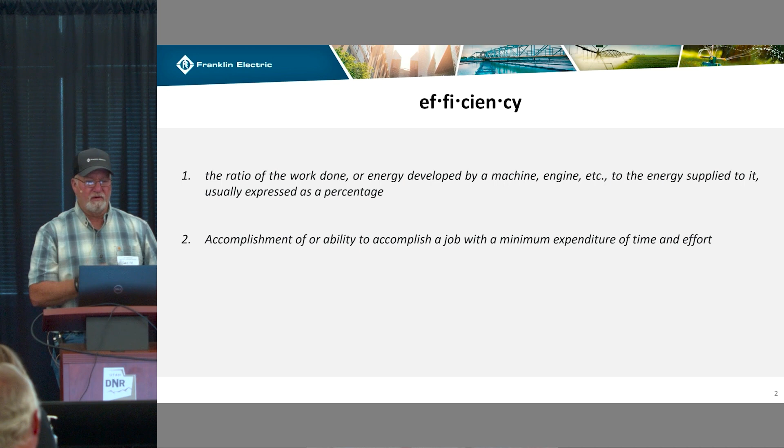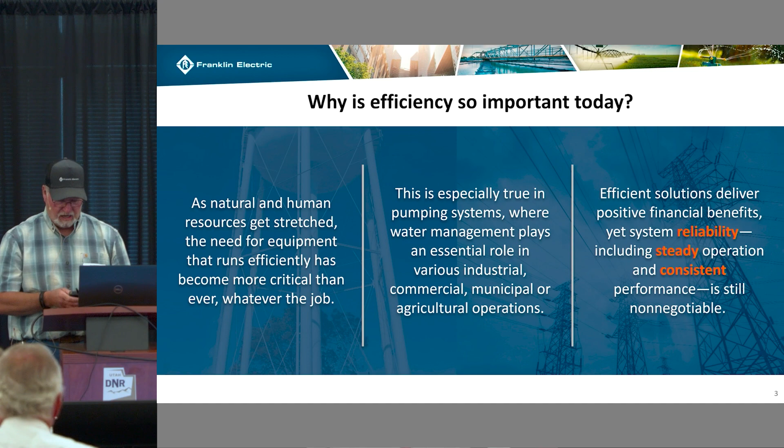So why is efficiency so important? Here are the top reasons it's important in our industry, the groundwater industry. Number one, our resources are being stretched, creating a higher demand for efficient equipment. Number two, efficiency is becoming extremely important in water management. And the third, to me the largest, is the financial benefit. So those are the top three reasons why it's so important in our industry.

When we think about efficiency related to pumping systems, here are a few challenges we're faced with today. We've got an aging infrastructure, and that's not just the power grids that supply us the energy and electricity we need, but also things in the actual water system itself, some aging components, piping that's degraded, different things like that. And then more power consumption is being used, more water is being used, and there's more of a need for water conservation now, and more regulations being put on us.

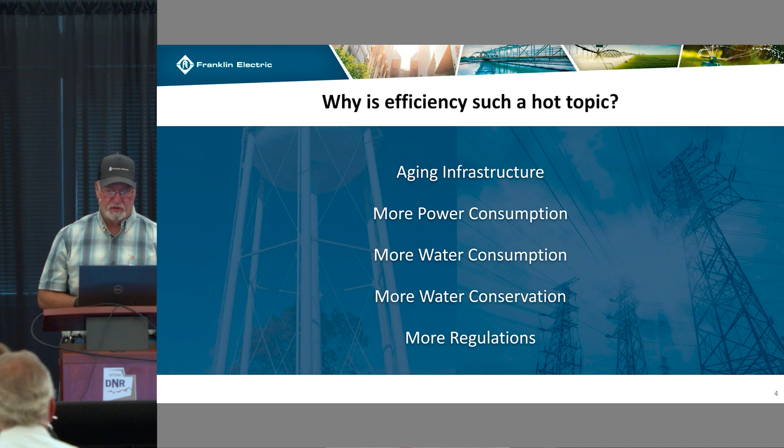The other problem we're seeing is people moving from other states into our states. I happen to live in Idaho, I can say yes, it's happening. And you live in Utah, and I know you've felt it and seen it too. So with that, it's just requiring more power, more water, and people are moving out of places that might have had water, now they're moving into places where there's less, and we see more and more of that.

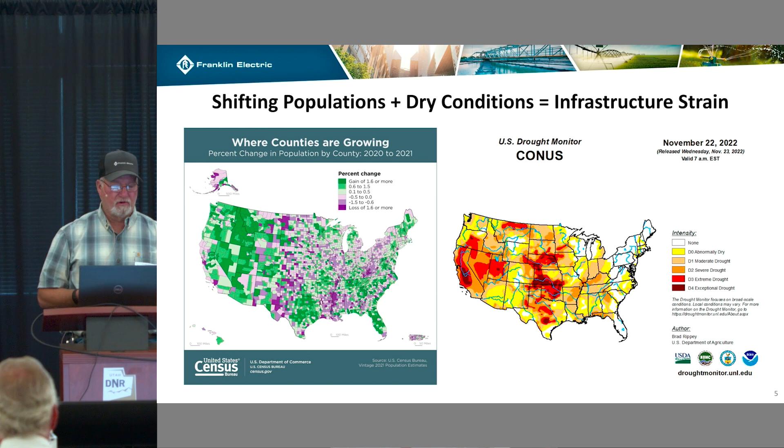So what happens when all of that goes on? Everything that gets a higher load rate on it, especially utilities, the price for power goes up. And not only that, but governments get involved. And I can tell you that there's already some involvement there.

So I can tell you that one thing Franklin looked at and did was not only did we meet those standards, but we exceeded those standards. And so everyone had to start putting what they call a pump efficiency index on every single product out there. And then we saw it before that with, say, surface pumps. And that's why premium efficiency became so important in the surface pump world.

Yes? So how did you do that, you just make the windings tighter? I'll get to that.

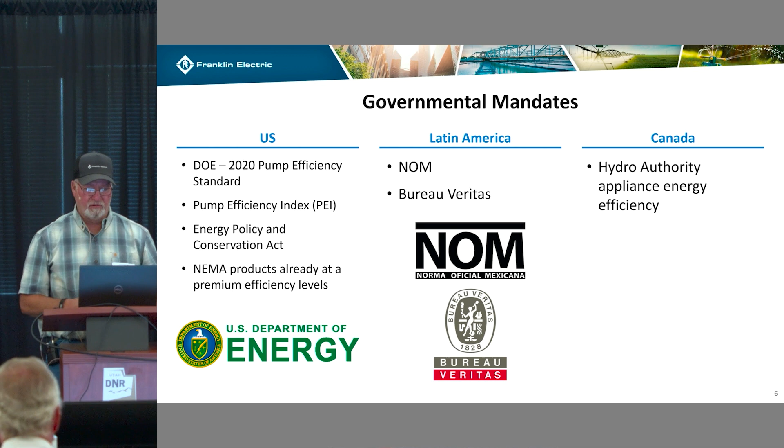Okay, so basically all of these regulations being put on us, this list is just going to grow, and the demand for more efficient pumping products is just going to increase. We won't see that decrease ever.

Franklin's getting ready to celebrate 80 years in the industry, and so we understood and knew submersible motors. For years we were making our motors for other pump manufacturers. And when Franklin decided to get into the pump business, we understood that there was a need for an efficient 4-inch pump.

So I want you guys to think about something. A standard 4-inch pump for years, the standard hydraulic design, is what we call a pancake style impeller. It's flat across the top and straight flat across the edges.

So I want you guys to think about something. As that water comes through the suction of the pump, the first thing it's doing when it goes through the eye of the impeller is it takes a 90-degree turn. As it exits to go to the next impeller and the next stage, another 90-degree turn. When you continually do that and you have a high stack rate, to get water to the surface and build pressure, you just continue to increase stages. And with all of those 90-degree turns, that 4-inch pump with that flat pancake impeller becomes very inefficient.

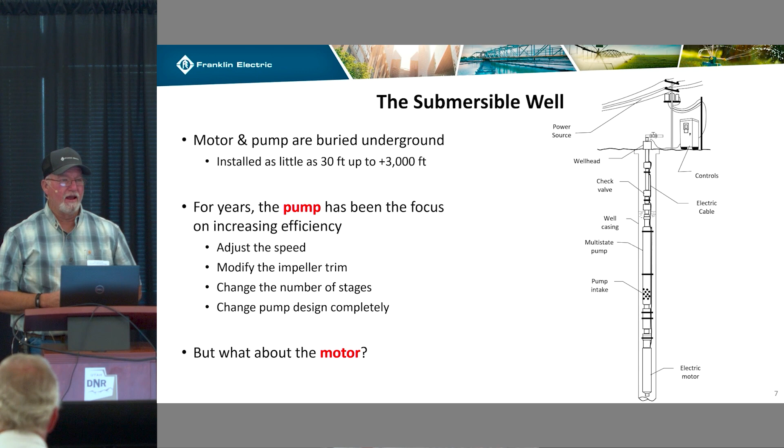I guess I don't know enough about it, why does that make a difference? I'm not gonna lie, that is way over my head as far as how that process goes, but I can say that it makes a difference in the temperatures that it can handle. It makes a difference in abrasives that go through the pump, how well it handles that and stands up to that. Yeah, exactly. The glass filling is what gives it its abrasive resistance and temperature resistance. It makes it tougher.

Okay, so on your different stages, it would seem like there's only two things if they're all hooked up to the same motor, turning the same speed. So the only two things you could change would be the tilt on your blade, or the spacing, how many of them there were in each stage. Correct. And you would seem like you'd need to change that as you went up the stack, so that each one is able to apply some more pressure from the one below.

Actually, all of those impellers in, say, our 4-inch - now there are some turbine designs, but we only change those when we're looking at horsepower. So when we start to trim those and change impeller sizes, we only do that in, say, very large turbines. We don't do that in our 4-inch product. So they would all be the same, all the impellers are identical all the way up the stack.

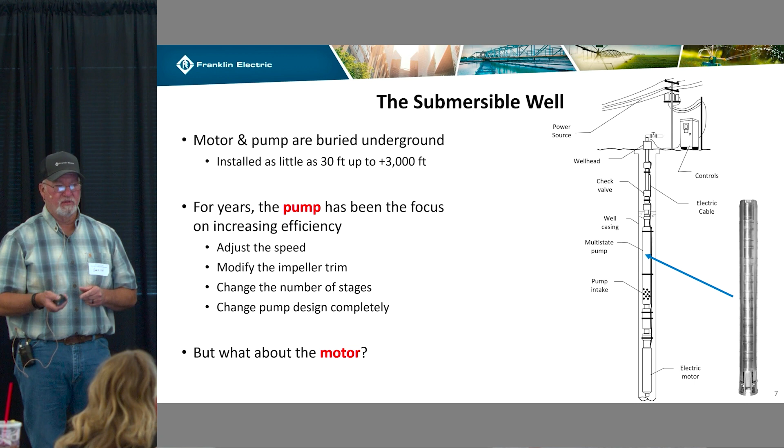Correct. But the higher efficiency comes from the actual impeller design, being a radial turbine design versus what we consider an inefficient flat pancake design. Pushing up instead of out. Correct. So if you think about what has changed there with the pump over the years, what hasn't changed? There's the pump. The motor hasn't changed for years.

Franklin's been a motor manufacturer for almost 80 years now. Franklin actually came out with the very first encapsulated 4-inch motor for wells. We didn't invent the very first submersible motor for wells, but the first encapsulated winding was from Franklin Electric.

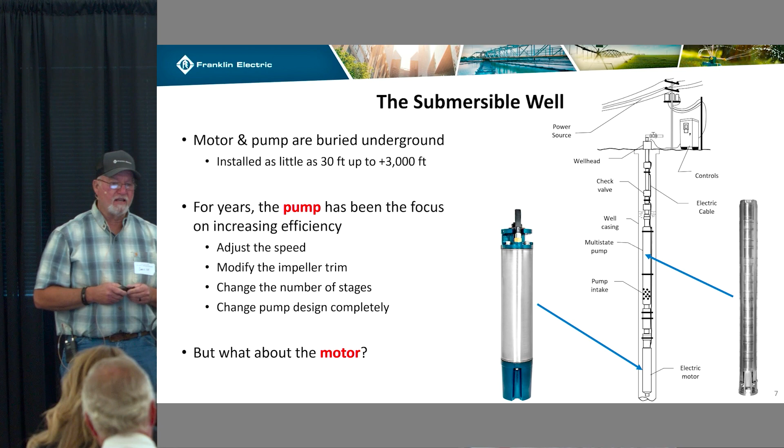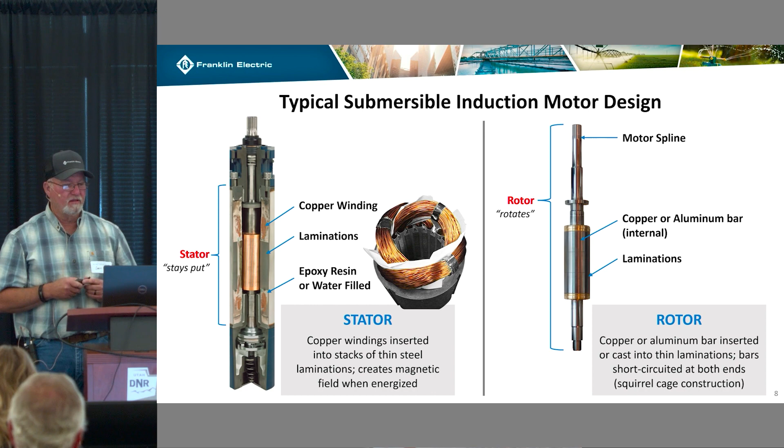So there hasn't been many changes as far as the motor goes, right? When we look at a submersible motor, I only really want you to remember two things about the design: that the rotor rotates and the stator stays stationary, okay? I'm going to jump through some of these quickly so we can stay on track.

So when I talked about in an induction motor that the rotor rotates and the stator stays stationary, I want you guys to think about how this works. We actually apply current to the stator, and the current is what turns and goes around the stator. That then is transferred to the rotor and creates a magnetic field. Then that rotor starts to turn.

But I want to tell you why an induction motor is not very efficient, and that's because there's losses in that process. As we're creating that magnetic field and forcing that rotor to run, we have some losses. In the submersible motor world, we call those losses slip. So if you open up a pump curve, 90% of the pump curves you're going to look at today are all probably 3450 RPM, not 3600 RPM. 3450 is in relation to what goes on when we have what we call slip.

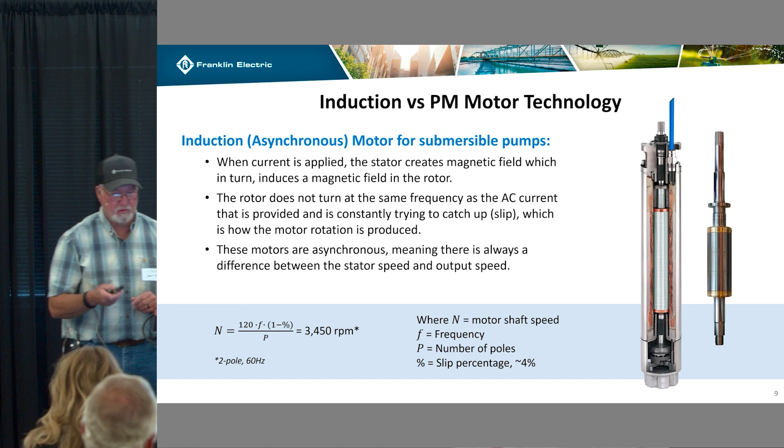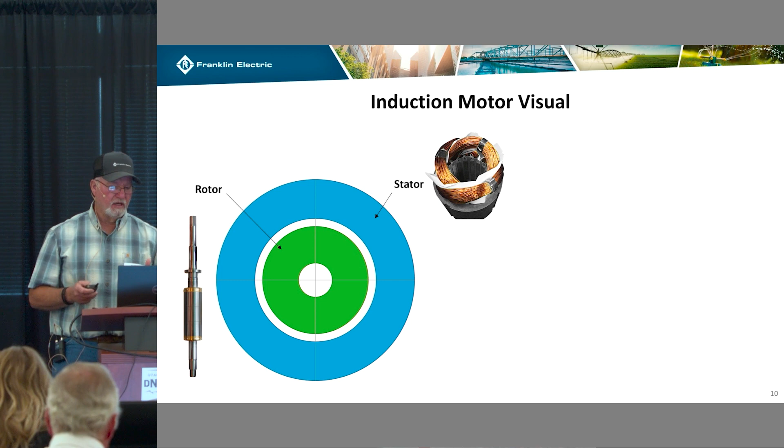Okay, so here's kind of a visual of an induction motor. The green portion being the rotor, the blue being the stator. We apply that current, which is in red, and it starts to go around. But as you notice, the rotor does not turn at the same speed. Think of it as a dog always trying to catch its tail, turning in a circle.

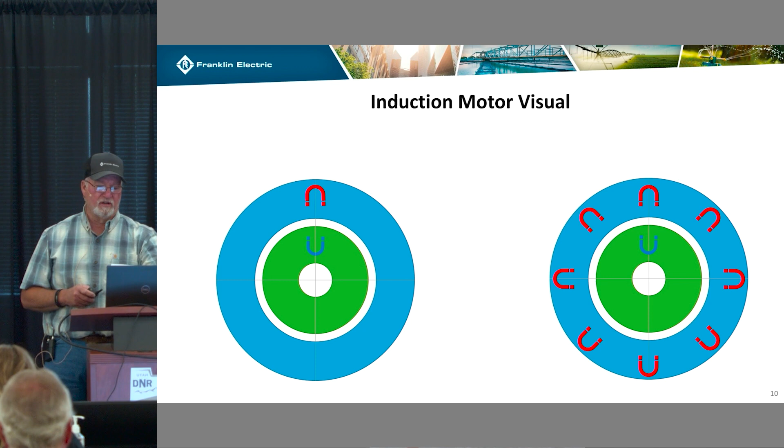Here's what that looks like, because remember, I did say the stator was stationary. So this just kind of shows that current moving around the stator, and then the rotor following it. But it's not synchronous. It looks like they're going the same speed, it just is lagging. They are, so you're correct. It does lag behind. It's not a true synchronous motor. It's what we would consider asynchronous.

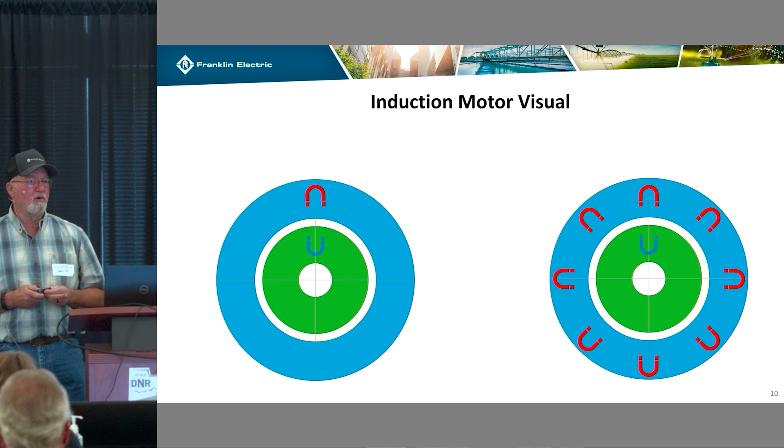So if you had them matched up, would that be more efficient? The less load you have, the closer it gets to synchronous speed. So at 3450 at full load, at no load it's going to be running at 3550 - it'll run 100 RPM faster at no load, because the torque is developed by this thing called slip, and the farther the electric field is behind, the more torque it develops. Well, the more electricity it's going to use too. Sure.

Okay, so one thing that I really want to point out here, and I want everyone to walk out of this room and remember, is that we didn't just go out and create a whole brand new motor design. The only thing that changed in the Franklin Electric submersible motor that you know today is the rotor - we took the copper bars out. If you see in this picture, all the way over here to the right, you're going to see the copper bars. So we took those out of the rotor and we put in rare earth permanent magnets.

That's it. The sealing system stayed the same, your thrust bearing system stayed the same, the way that we encapsulate the windings, right? Everything else - the material on the shell of the motor, the whole 9 yards, the way we do the shaft - everything is still the same. The only change is we took out the copper and replaced it with magnets.

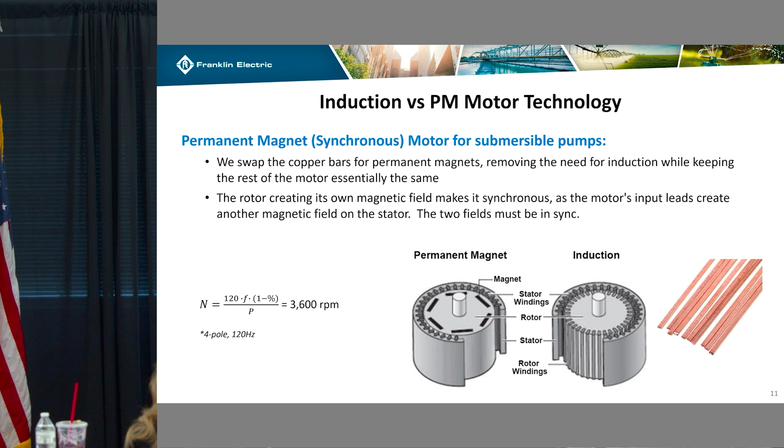So what did that give us? Well, now we don't have to create that magnetic field. We don't have to take that current applied to the stator and have those losses go to the rotor - we've captured all of those losses. And now with this design, as you can see, we've got an example of an induction motor and a permanent magnet motor, and you're going to see that the permanent magnet motor is a true synchronous design.

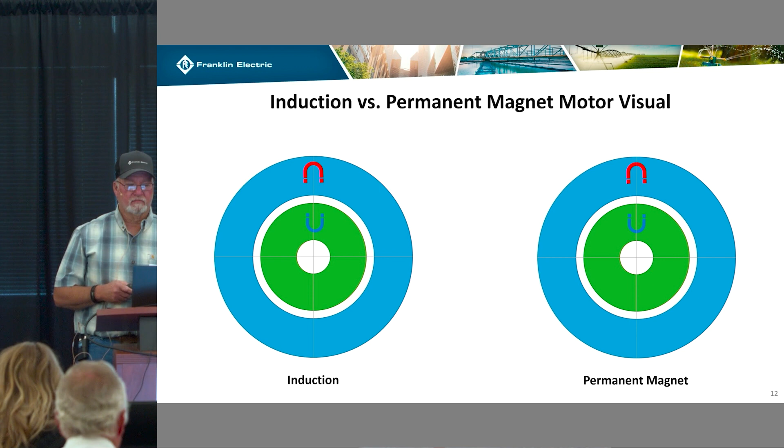Is that just because instead of dragging it, you have to induce the field, so there's some lag there, and that's why it's dragging on the other side? The magnets in the rotor are actually pulling too? The magnetic field is more uniform, so you're not getting the lag.

Yeah, correct. This is why I'm glad I brought Paul with me. You don't have to energize or induce the current any longer because the magnetic field is already there in the rare earth magnets. Thank you, Paul. You're ready to go at start. So basically, we've taken away having to put that extra current into the stator and transferred that to the rotor. It's already in the rotor. Those magnets are already there.

So it runs 150 RPM faster? Yeah, it does. It has the ability to run that, yes. And I'll tell you why we don't run it right there out of the gate in a couple more slides. But thank you, Kyle.

A true synchronous motor runs at 2-pole speed, which is 3,600 RPM. You are correct. And that's also an advantage with a permanent magnet motor, and I'll show you why.

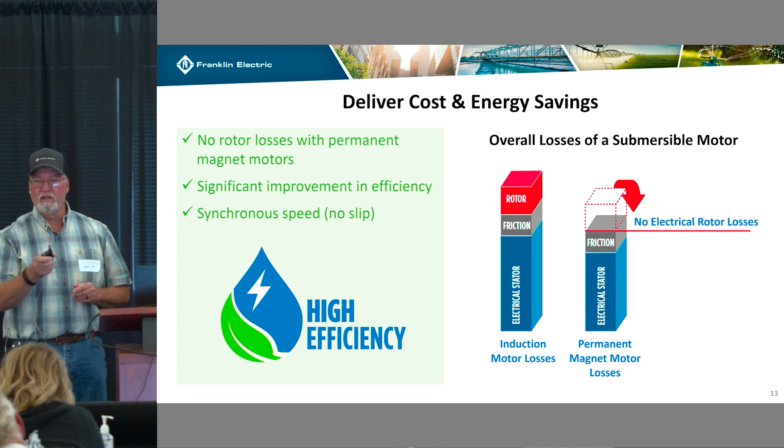So when we look at what we actually gained, we have to keep a couple things in mind. We have the same bearing system and the same sealing system, so basically we have the same friction losses as we did with an induction motor. But where we really gain is that now we have no electrical rotor losses.

So how much more efficient is the permanent magnet motor than an induction motor? We've made up this chart showing 4-inch through 10-inch, and by the way we are making this through 500 horsepower today. If anybody wants to order a 500, I'm taking orders today, and I'll give a discount, just one day only for the Utah Department of Water Resources training.

Everything in green is what you gain, everything in blue is a standard induction motor, and this chart shows efficiency. The biggest gain, looking at the 4-inch, would be a 5 horsepower: an induction motor is 78% efficient, permanent magnet is 90%. Looking at the 6-inch at 60 horsepower, a 6-inch induction motor is 84% efficient, permanent magnet is 92%. That means there's up to 12 points, a 21% improved efficiency using a permanent magnet motor.

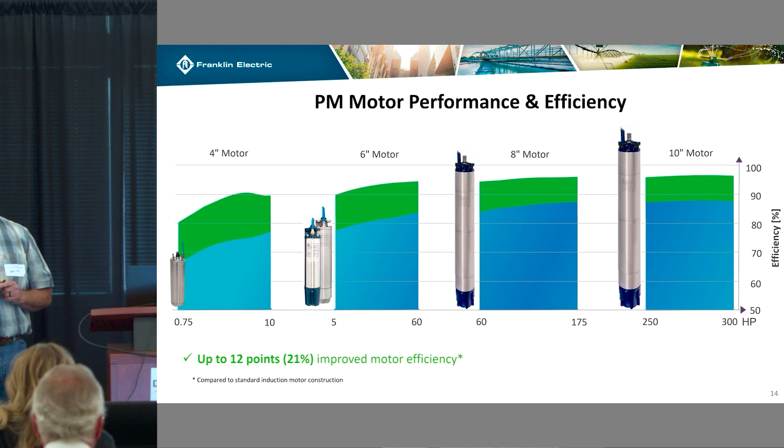And by the way, to Kyle's point, that's compared to a standard induction motor construction at 3450 RPM. This motor has the capability to run to 3600, and I'll talk about that too.

Are those all on the top of that small one? I noticed it goes up and then back down as you get from 8 to 10 horsepower. Do they all do that if you ran it out a little ways? Is that why you're going to a larger motor, or is it just to fit a larger hole? Because you're squeezing 10 horsepower out of a 2-inch diameter rotor and a 3 3/4-inch diameter casing.

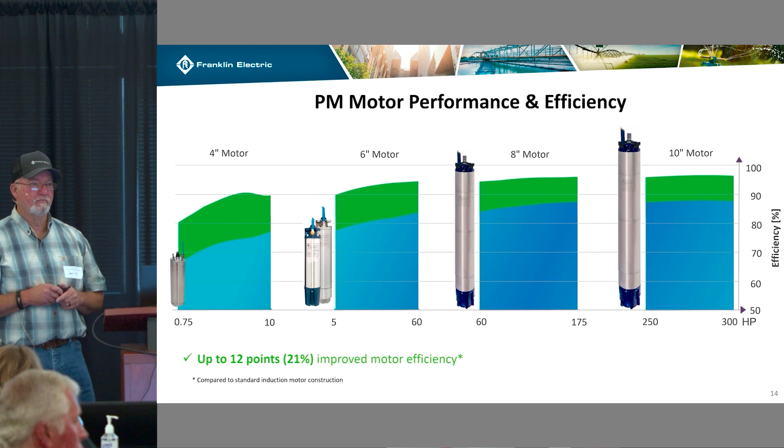And that's really hard to do, so that's why the efficiency dips at the top end. The bigger motors are just this big around, you're getting 10 horsepower, the rotors that big around, and that's why the efficiency goes down, because it's almost an impossible task. Right, but Charlie, you're correct.

Why haven't we seen any permanent magnet T-frame motors? It's coming. Did you guys really start this design? So Franklin—and this is a perfect slide to explain this.

Permanent magnet motors are nothing new. Most of the appliances in your home—dishwasher, washing machine, refrigerator, your computer drive motor, swimming pool pumps—it's huge. In fact, in the state of California, you probably can't buy a swimming pool pump with an induction motor; their regulations say it has to be permanent magnet.

Electric vehicles, most of your hand tools - permanent magnet motors have been around for a very long time. Franklin has been building permanent magnet motors for years. In fact, for one of our competitors, we manufactured their permanent magnet motor for about 10 years. In Europe, this 4-inch permanent magnet motor is our most popular motor, and that's all due to regulations. So we've been doing this for a long time - not 30 years, but 10 years plus.

But what rare earth minerals you mentioned, are they the magnets? Yes, rare earth magnets. Where is that coming from? That's something I never would have asked before the pandemic, but the supply chain got screwed up, and I know most rare earth stuff comes from China. Most of it is European. And I will tell you, our manufacturing facility is also in Europe today for permanent magnet motors.

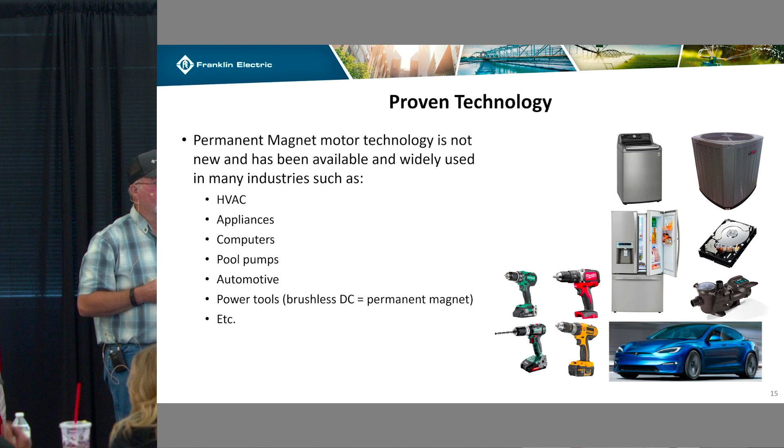Right, but DC motors are way less efficient. Locomotives now, they're changing from DC traction motors to AC variable speed motors. Could you imagine if we could do locomotive engines with permanent magnet?

Well, so my question is, with a brushed motor, what does it look like in terms of the lag? Because you're not going to have that same lag you have where you're trying to induce a current in your rotor and then drag it along. That's the advantage it looks like you have with the permanent magnets - you're not trying to induce a current and then drag it. You've got two magnetic fields and they're attracted.

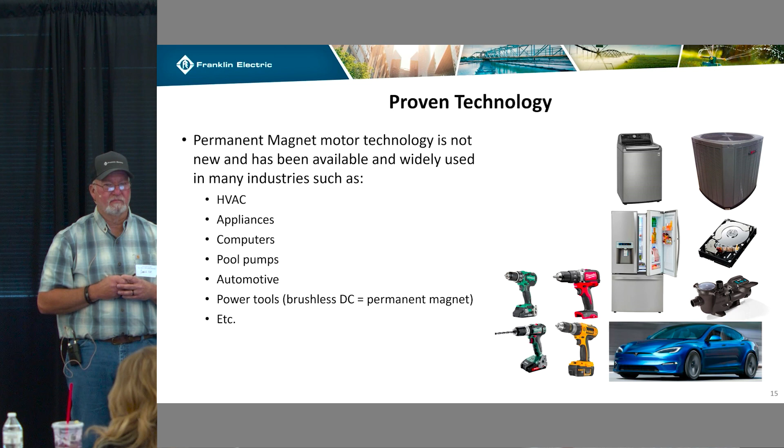Paul, do you have any input on that question? It seemed like you could do the same thing if you have brushes, because you're not introducing that extra inefficiency of trying to create that second magnetic field. Good question - electricity's already there. Well, it would work the same way, but you can generate much more power and torque with AC motors. I guess in principle it would perform the same as a permanent magnet theoretically, but as a practical matter, I don't know if that would work.

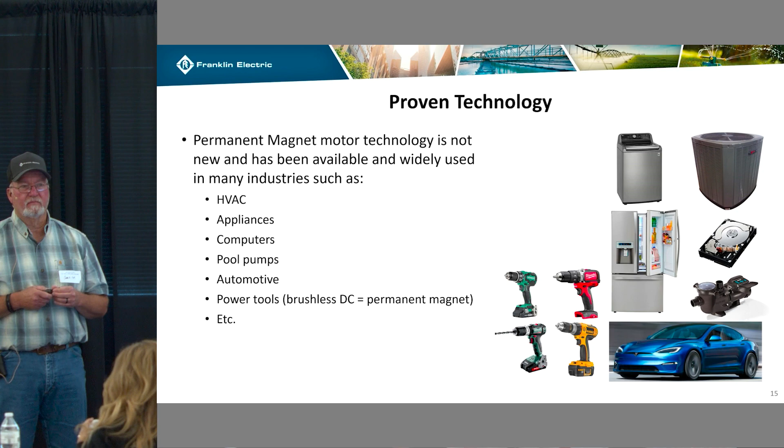Well, the alternator in your car is an AC generator, and the only reason you get DC out of it is because you're running it through diodes to flip half of the signal over. You can do that, but I don't know if pound for pound you're getting the same delivery of power out of a brushed motor as you would out of a permanent magnet. That I can't say. Oh, okay, I just wondered if you knew, yeah, all right.

Okay, so moving on. One thing I want to touch on is that all permanent magnet motors - I don't know of any that exist today that do not require a VFD to operate. I'll quickly tell you why, then we'll talk about VFDs for a minute. What needs to happen with a permanent magnet motor is the rotor and stator fields always need to be aligned. The VFD does that.

The other thing, we talked about being able to run at 3,600 RPM, right? And another feature we use, like in the sub-drive world, where we're mix-matching motor horsepowers and running above a certain hertz - we're never overloading the motor, we're never even running into service factor when we do that. But we do need the ability with the drive to run above that speed, and that's another thing the drive gives us. So the drive helps keep the rotor and stator aligned and allows the motor to run above power line frequency.

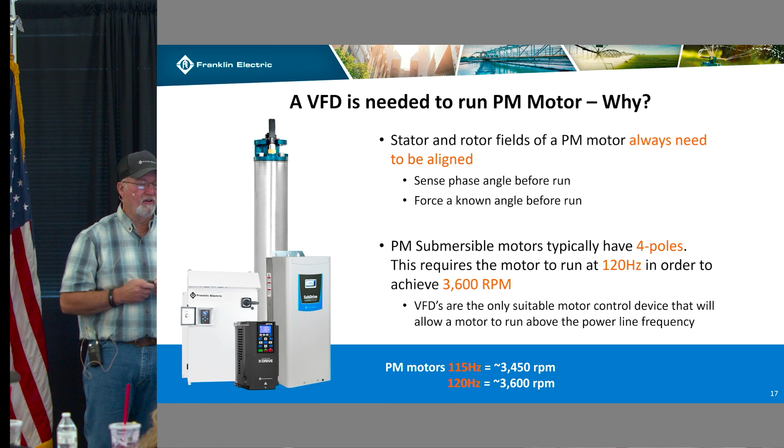Now, keep in mind that I did say it takes a VFD to operate a permanent magnet motor, but you want to make sure that your VFD has the capability of doing it.

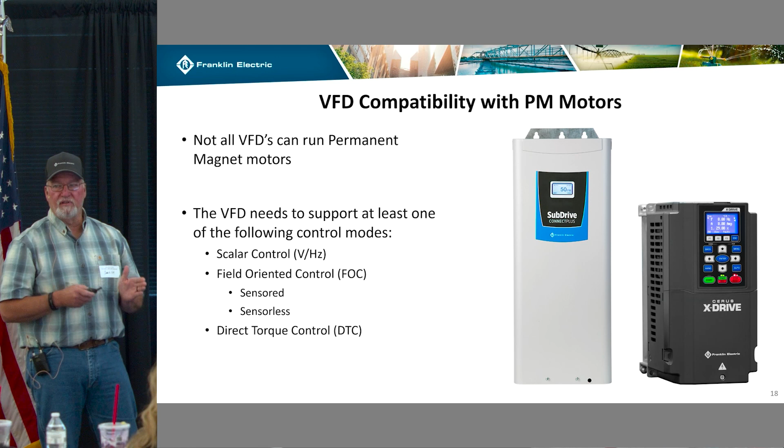So one thing, just to make this pretty short and sweet, if it were me and I was a contractor and I was going to be installing a permanent magnet motor, I would buy it as a package. I would buy the manufacturer's VFD that is probably already programmed to run a permanent magnet motor. I don't want to just go pull something off the shelf or something existing and then have to go through all that programming, and here's what that looks like.

So if you buy a permanent magnet motor system, just buy it. Doesn't matter who the manufacturer is, just buy it as a package system. Buy the drive and the motor together. That way you know they're working together, and they're probably 90% already programmed for you, as you saw in option 1.

We won't spend a whole lot of time talking about benefits of a VFD because most of you in the room already know that. But what we will talk about is how to explain that to an end user. So we all know and understand that VFDs can soft start a motor. They can prevent water hammer. They can provide us constant pressure, which is probably 99% of what your customers are looking for, right? And it can also give us the ability to convert phase, so single phase to 3-phase. That's all achievable by using a VFD.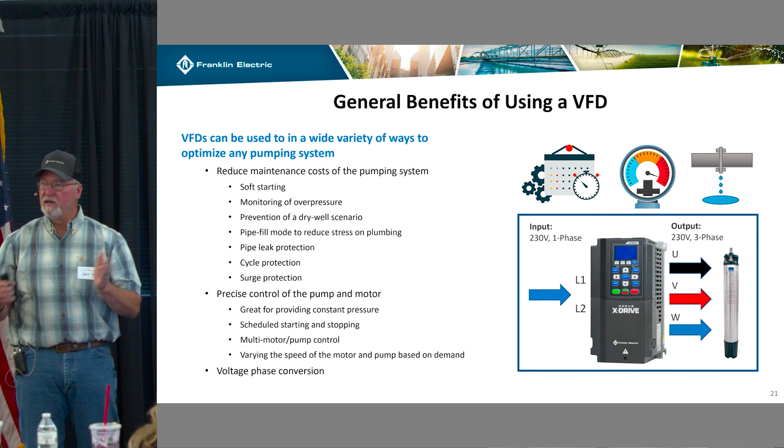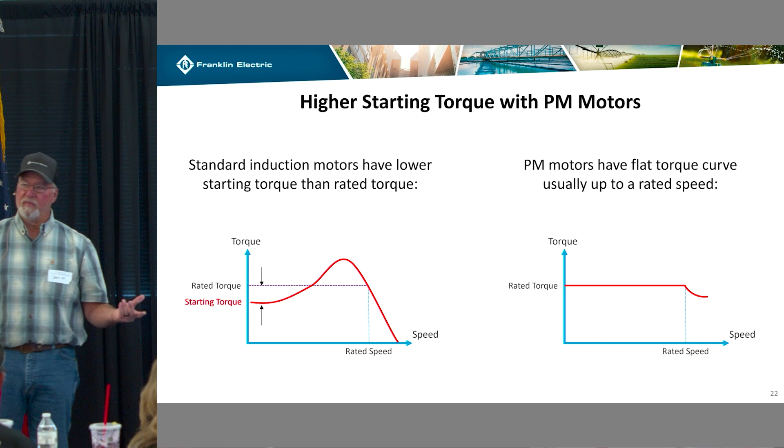One other thing you get with permanent magnet motors is higher starting torque. Let's say a cabin well has sat for months without running. Impellers could get a little iron fouled, and you could have debris built up in there. If you're on a VFD and it goes to start, what could happen? Blocked rotor - it could pull higher amps and the drive would kick out to protect it. In some cases when I get those calls, since it's a 3-phase motor, we might have you swap the leads outside and bump it backwards for a minute to break up whatever's settled inside the impellers, then start and run. But with a permanent magnet motor out of the box, you're going to get higher starting torque, so that might be a benefit.

So the other benefit - in our 4-inch line, our 2 and our 3 horsepower are the same part number. So when you open and take that out of the box, it's going to have a rating on it for both a 2 and a 3 horsepower.

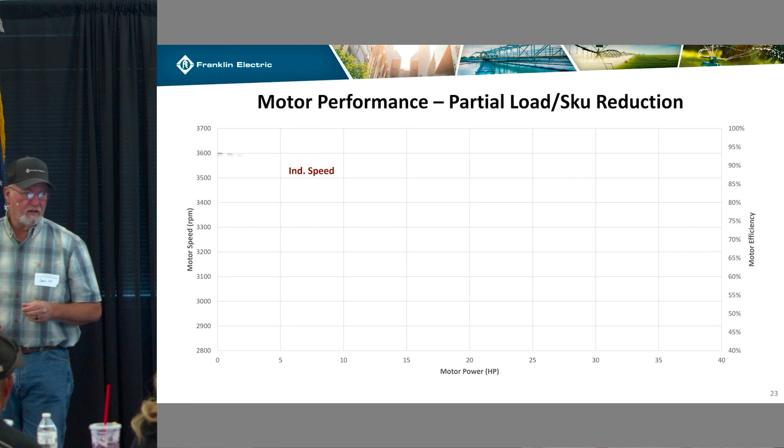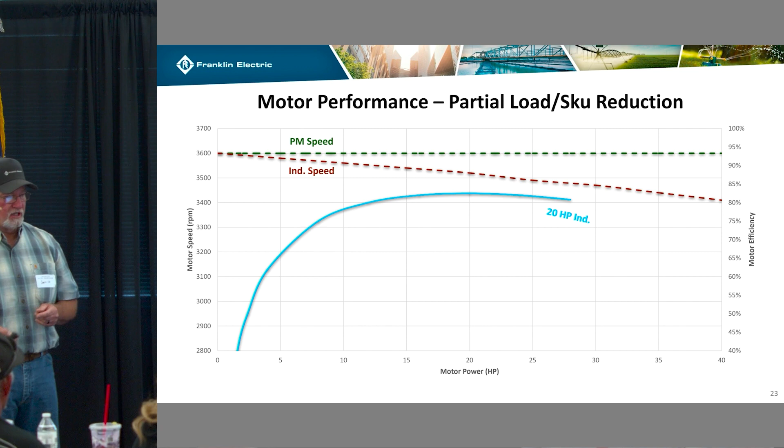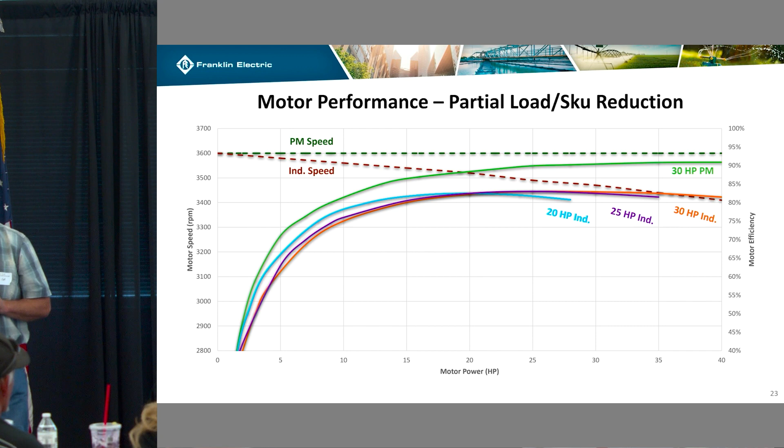Now looking at our 6-inch product line - this is just a demonstration, not a pump curve. This is a motor speed and efficiency curve with horsepowers. There's a 20 horsepower induction, a 25, and a 30. All three of these motors are covered by one permanent magnet motor. So instead of stocking 9 motors at your distributor, they're now going to stock 3. One motor covers 7.5 through 15 horsepower, another 20 through 30, and the third 40 through 60. So only 3 motors is going to take to cover 9 ranges.

There's another huge savings on cost for wire - up to 22% longer wire runs per wire size, per horsepower, okay?

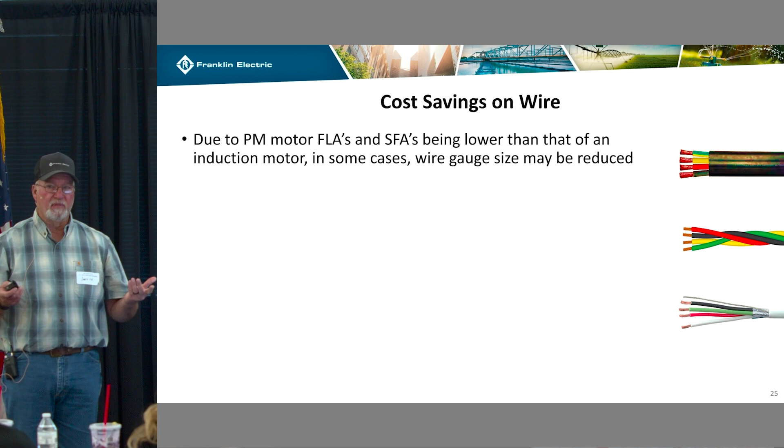That's pretty huge, let me show you an example. I used a 60 horsepower motor for this chart I made last year. A 60 horsepower, 6-inch motor is rated at 92.3 service factor amps. It's going to require number 3 wire at 550 feet. If you look at a permanent magnet motor, it's only going to draw 80 amps, and you could use number 4 wire. So in this application with 550 feet, you would have saved the end user $822 in wire - that's $822 more in your pocket.

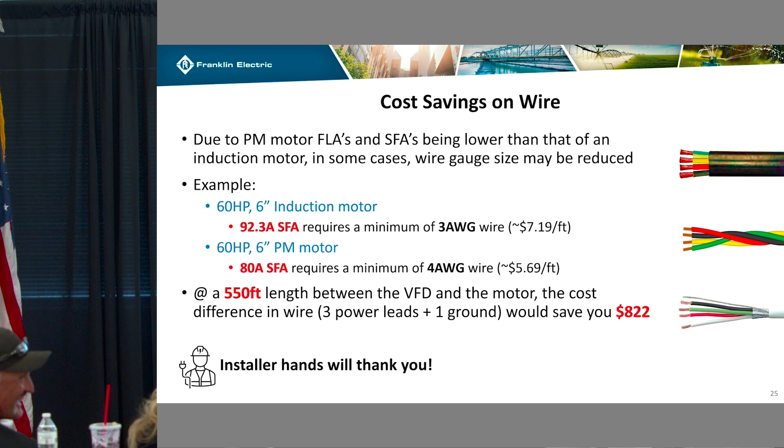Why would you give the customer back that?

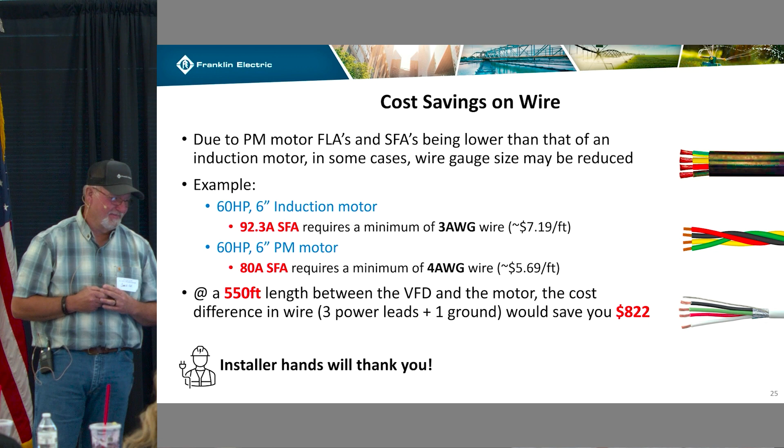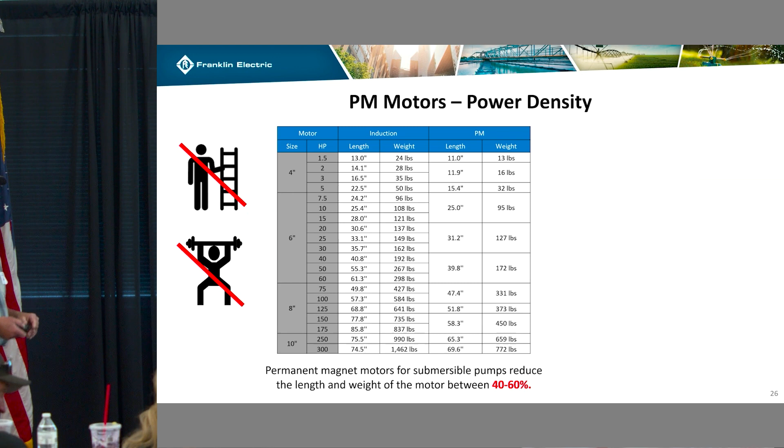Well, there you go, do with it what you may. Not only that, who would much rather be installing smaller wire? Me, right? Here's another thing that's pretty cool - the size of these motors.

I actually brought one, but then I realized I grabbed the induction motor out of my truck and wasn't going back out. So the size is considerably less - we're going to be 40 to 60% less in length, not diameter, in length and weight by using a permanent magnet motor. In this chart, using a 60 horse as an example, but all of them pretty much follow this same pattern: a 60 horsepower induction motor weighs 298 pounds and is 61.3 inches long. A permanent magnet motor is only 40 inches long and weighs 172 pounds.

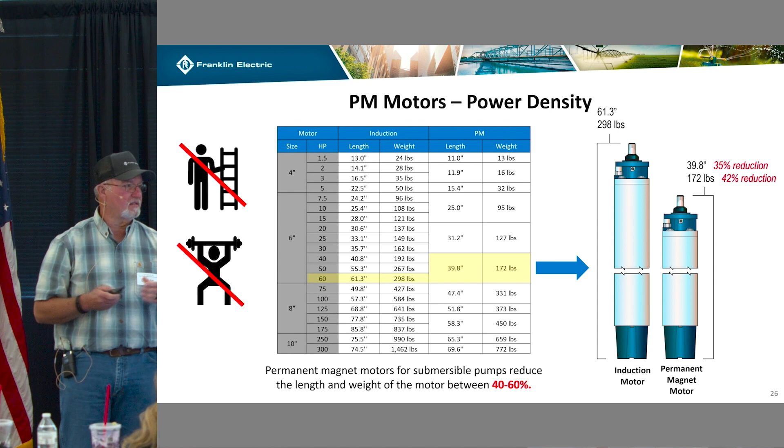So would you rather install a 172-pound motor or a 300-pound motor? It might even make a difference on what rig you drive that day, right? Might even make a big difference in what pipe you put down the well. We've had cases with really deep sets on 4-inch where the guy said, I hate using galvanized, but I have to because this is a 5 horsepower motor. Well, look at the difference in this chart - an induction 5 horse weighs 50 pounds, a permanent magnet weighs 32 pounds. Pretty big difference when we start hanging that thing at, say, 600 to 800 feet. It does make a difference.

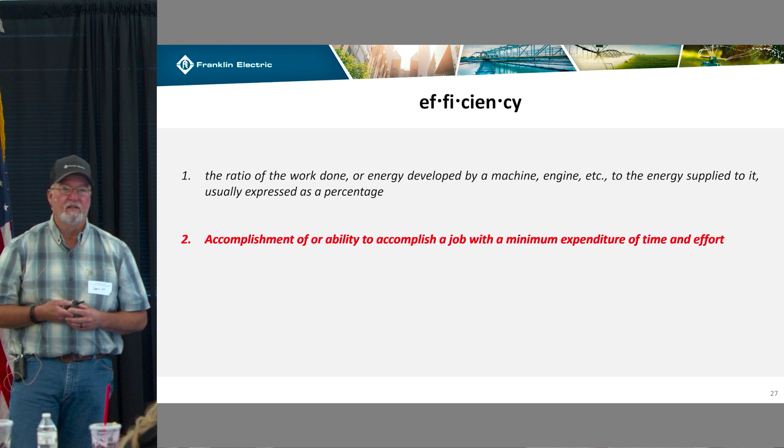And once again, it makes a difference for you. Remember I told you to remember that number 2 accomplishment, for efficiency? That becomes - you become efficient with your time and your effort. Who uses pipe wrenches? Come on, everyone uses pipe wrenches, right? Who has aluminum pipe wrenches? Why? It takes a lot less energy to use that aluminum pipe wrench. You can run that thing all day compared to a 36-inch Ridgid one, so it does make a difference.

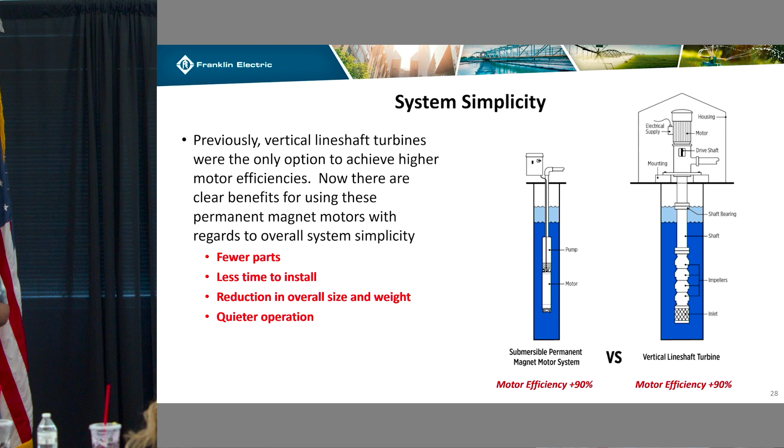The other big thing engineers have looked at for a long time is that submersible motors weren't as efficient, and we know that because I proved it with the induction motor. They're not as efficient as a line shaft turbine, until now. If you look at that chart, a line shaft turbine is 90% efficient. Well, now our submersibles are 90% efficient too, so we've matched that.

In some cases there's a big benefit to using a submersible. There are fewer parts, less time to install it, a reduction in overall size and weight, and it's quieter. If you're putting it next to a subdivision, nobody's going to want to hear that line shaft turbine motor run all night during pressurized irrigation. They won't hear the submersible at all.

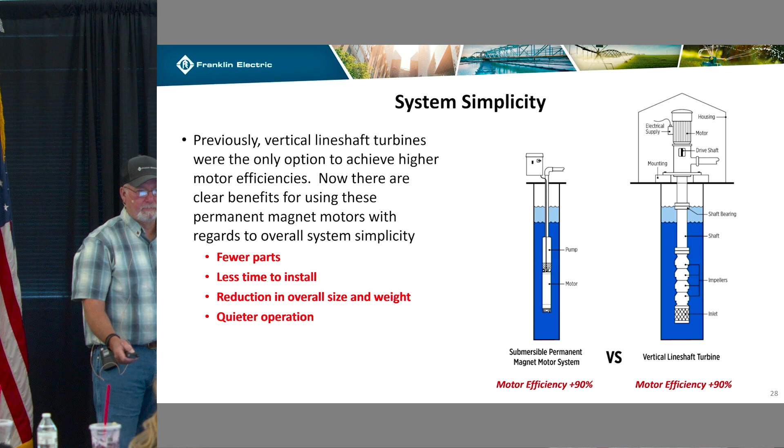So you're on the right there, that is a brushed motor. No, it's not. It's not? Nope. It's a squirrel cage induction motor. Oh, it's still induction, okay.

So we talked about the fact that this can run at 3,600 RPM and the benefits of that. I wouldn't go out and set up every single system to run at 3,600 RPM, because there's a good chance, per the pump curves we have today, that we could overload that motor. But where might it give us some benefit down the road to be able to go to 3,600 RPM?

I'll give you a scenario. In the middle of Idaho, there's a pivot, and a 15 horsepower pump that supplies water to it. There's 2 months left in the irrigation season, and that 15 horsepower pump is worn out. It can no longer meet the demand at 3,450 RPM. But we go out and bump it up to 3,600, cross our fingers, and now it's able to build the pressure and meet the demand. It might get them through the next 2 months without having someone out there overnight swapping it all out, or being on a 6-week waiting list for a component, and not being able to finish the irrigation system and possibly even lose a crop.

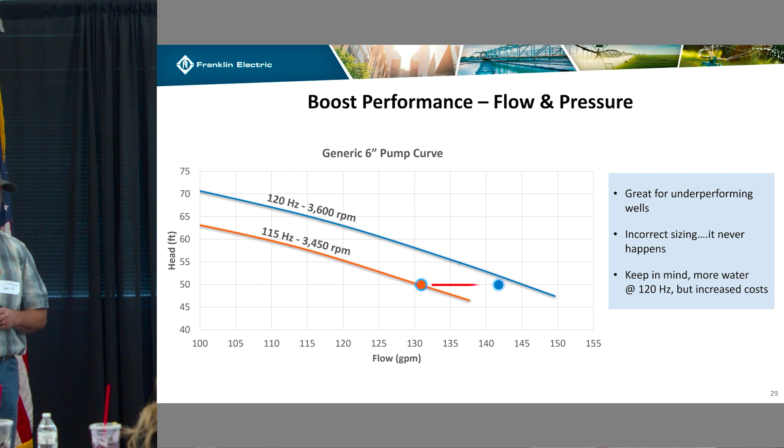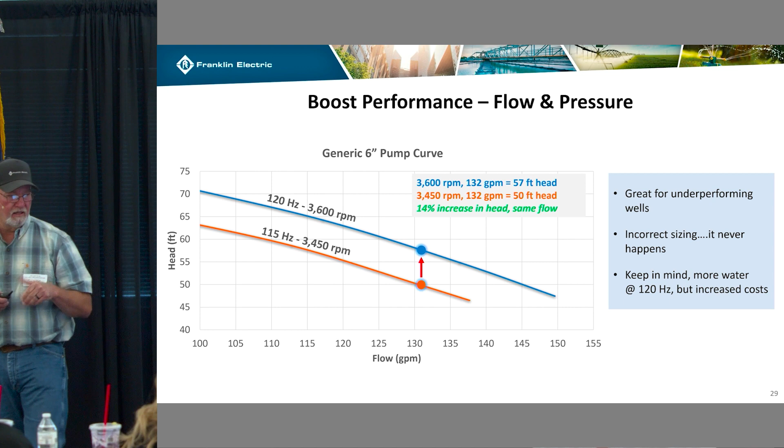That's one benefit to being able to run at 3,600 RPM in my mind. I wouldn't size everything for 3,600 RPM if I were doing it today. So the ability to run at 3,600 versus 3,450 - if we stayed at the same head pressure but just increased the flow, we can increase that by 10%. If we did the opposite, stayed at the same flow but increased the head, we could increase that by 14%. Just by going to 3,600 RPM.

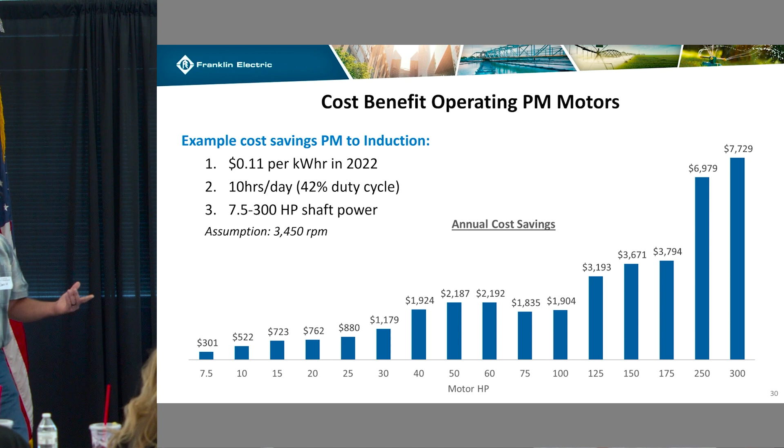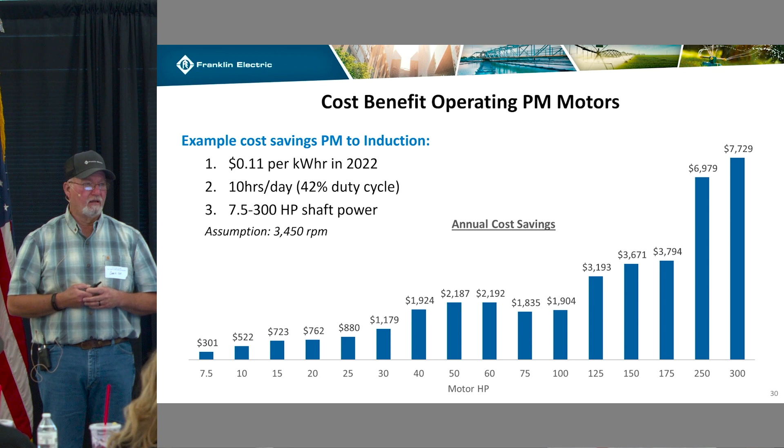Cost savings is huge. This is just a graph that shows motor savings, 7.5 through 300 horsepower. If you look at that, there's some considerable savings, right? If you were talking to a dairyman who had a 40 horsepower system, maybe even a 15 or a 20 or a 60 horse, I'll show you what that looks like.

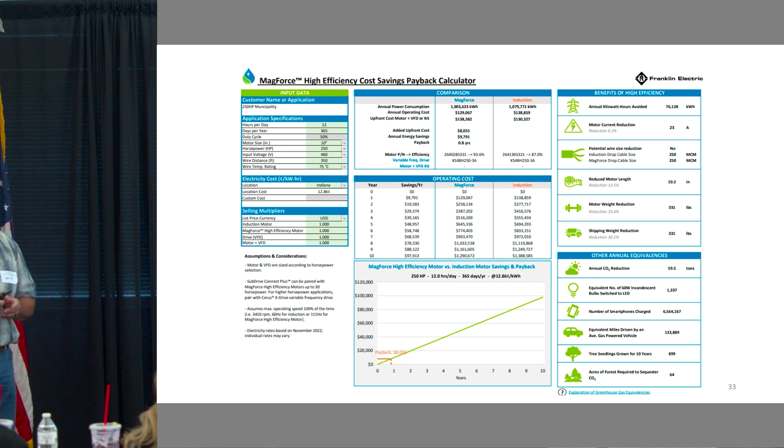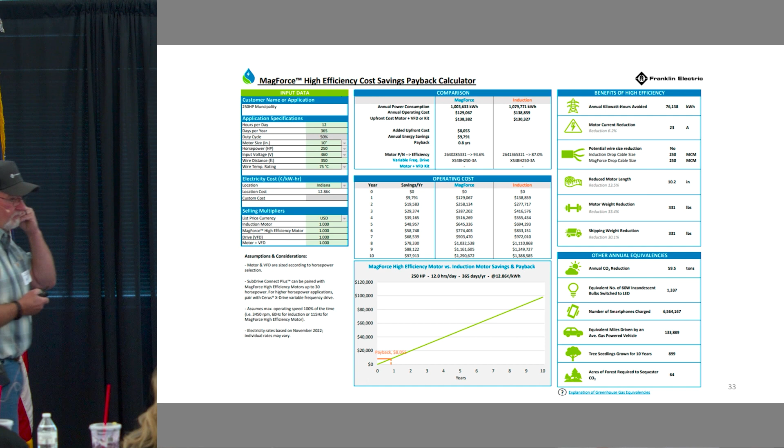I know this is a really hard chart for you guys to see, but this is a 250 horsepower municipality submersible motor. I won't get into all the duty cycles and everything else in this one, but I will point out the price difference. If you look at what they paid for a permanent magnet system, motor and drive - this is list price - that was $138,000. An induction motor would have cost them $130,000. So there's an $8,000 difference.

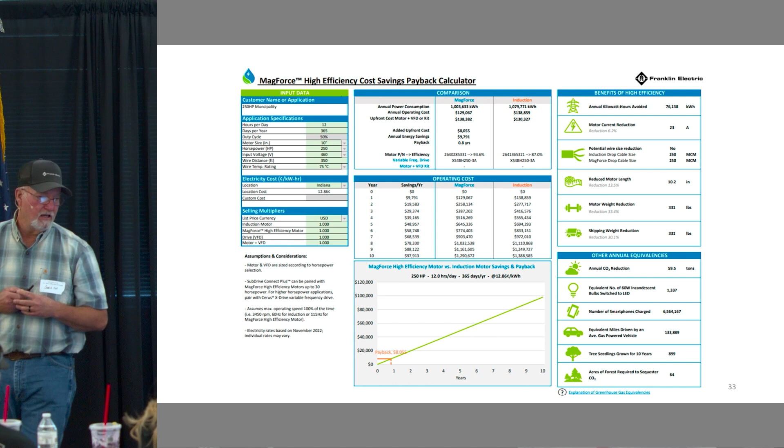But in the first year, we were able to show this municipality that they could save $9,791 on power. That more than paid, within the first year, for that system to be upgraded to permanent magnet. We say 1 to 2 year payback on these systems that use a lot of water and run a lot. If it ran for 10 years, these guys are going to save $100,000. And what's not changing? The price we're paying for our power - it's never going to go away, and it's never going to go down.

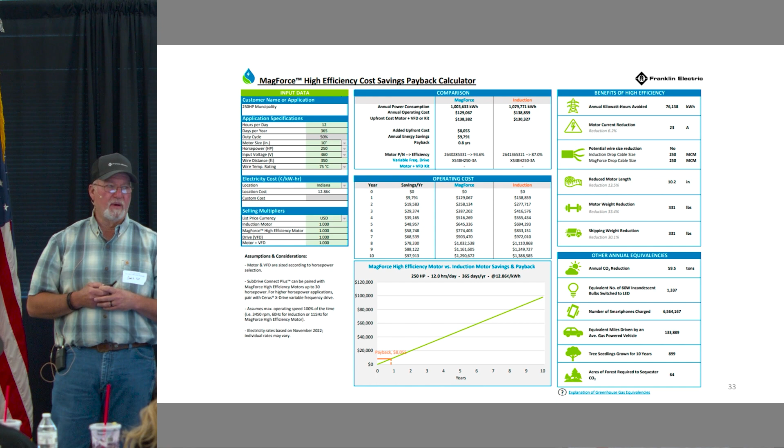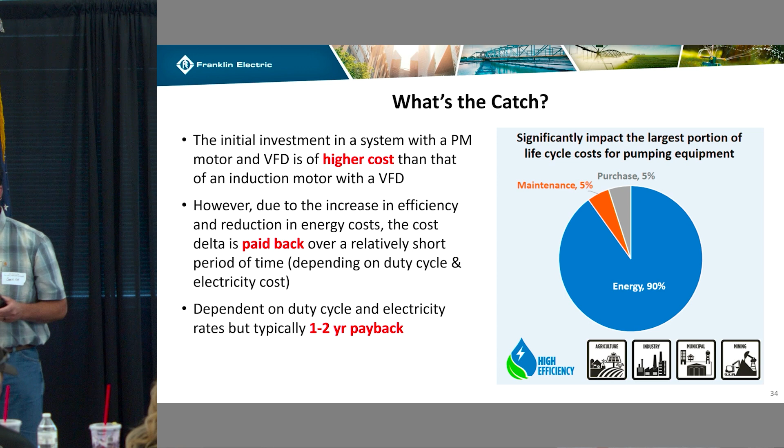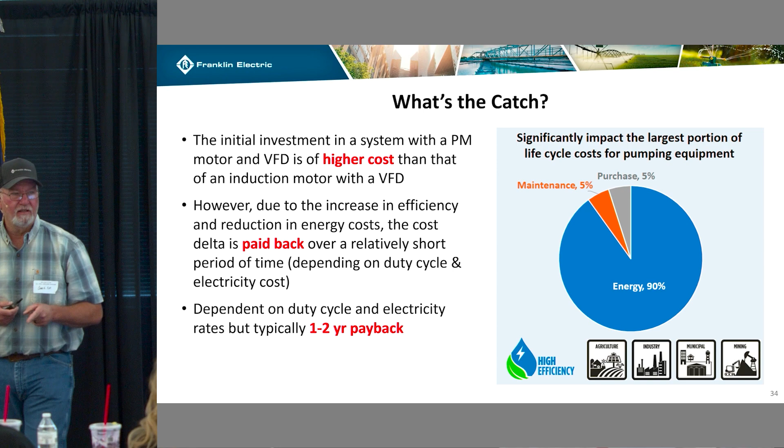The big picture is what this really costs you throughout its life cycle. Same thing with your car, right? How much does it cost you, not the initial purchase price, but to operate that car? The oil changes, the tires, the maintenance, all of that. So if you look at a water system, your initial purchase price is only 5% of what the life cycle of owning that water system is going to cost you. Another 5% for maintenance. But what's the big picture here? 90% in energy. So if the end user looks at that, it's going to be a no-brainer when they think about what motor they're going to put in.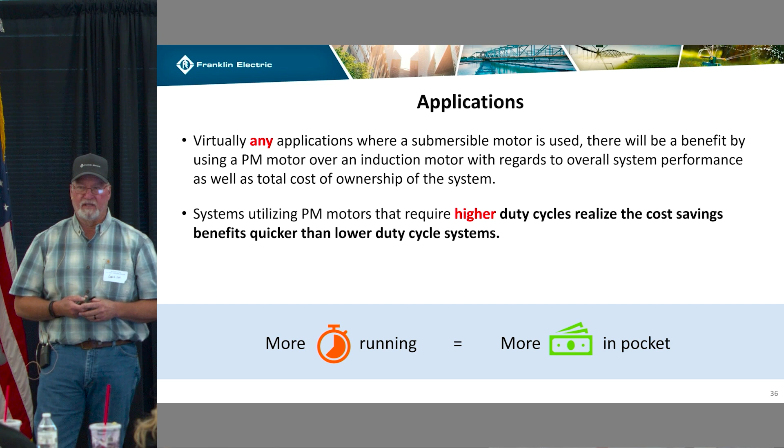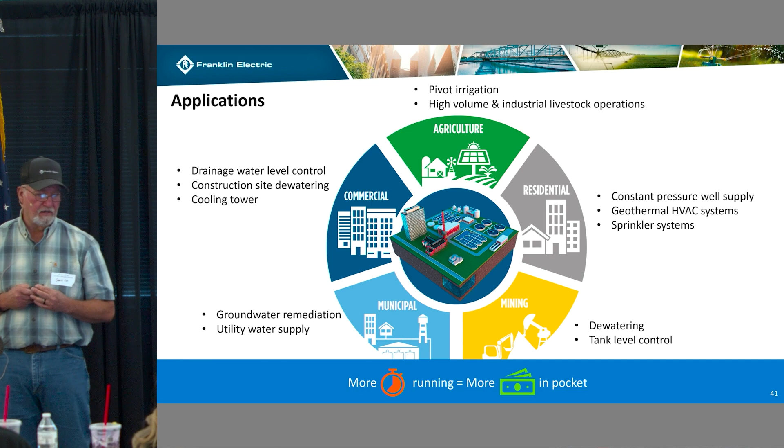More runtime, more payback. I said one to two years, and we haven't seen much over a year that it takes for them to pay back in those systems. Huge savings. So these are the applications: commercial, ag, residential, dewatering, mining, and groundwater remediation.

So we get asked a lot of questions about this. Does high efficiency mean that the PM motors run cooler than induction motors? No, they do not. Now, if they were the same length and had that same cooling flow, then yes, we would say there's probably a huge advantage to going to a permanent magnet for cooling. But they're rated the exact same. Most of your 4-inch motors are rated at 86 degrees.

Same thing here. What troubleshooting is different in a permanent magnet versus an induction motor? Nothing's different. You do it all the same. You use your megger the same, you use your meters exactly the same. We talked about the difference between 120 hertz versus 60 because this is a 4-pole motor, and it does run at 120 for 3,600 RPM.

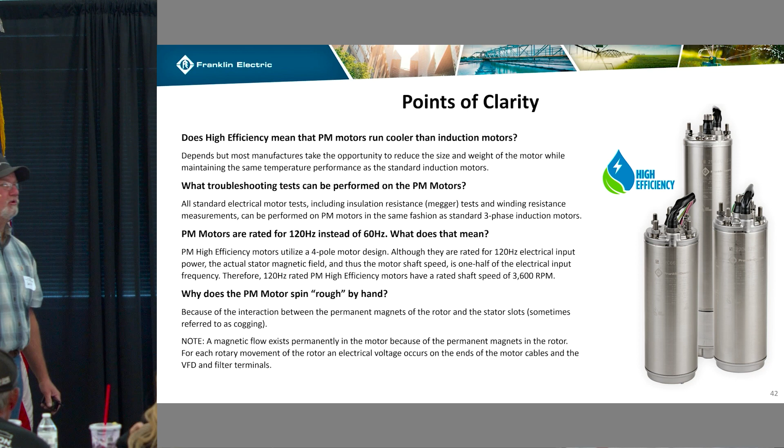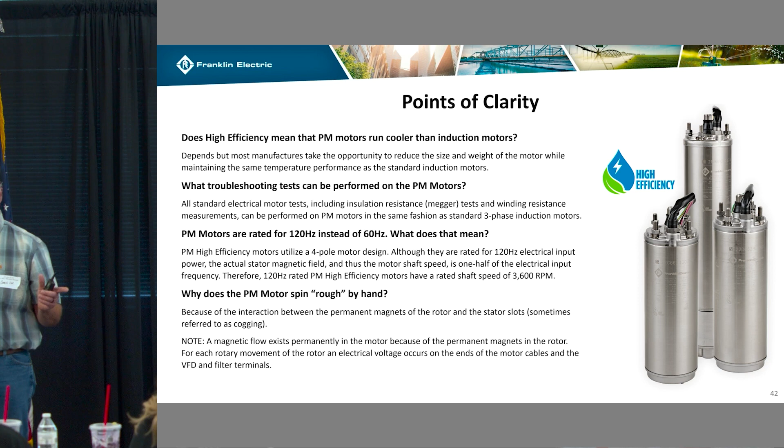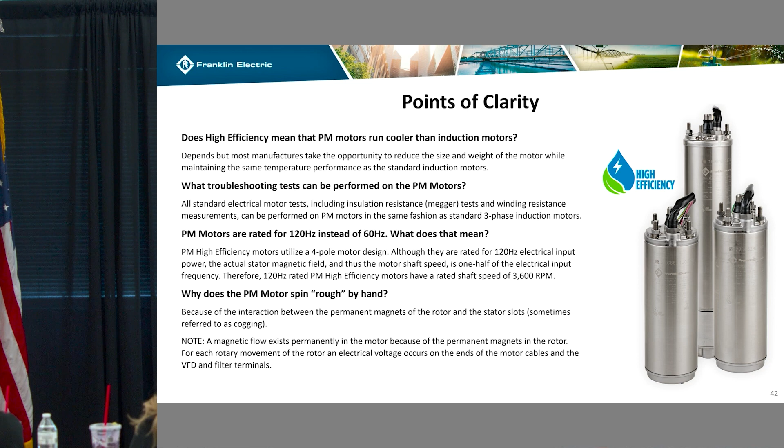Then why does it turn rough by hand? And this is where I really meant to bring one. So as you rotate, who installs 4-inch motors in the room? What's the first thing you do before you couple it to a pump? Turn the shaft, right? And you're going to notice that the first time you grab a permanent magnet motor and turn that shaft, it's not going to feel the same as the induction motor. Even though it has the same thrust bearing, you're going to feel those segments of those magnets as that rotor turns, so you actually feel some resistance there. That does not mean you have a bad thrust bearing. It does not mean that you can't put that motor down the hole.

Somebody asked about temperature with the magnets. The question was, do they ever lose... what's the word for it? There you go, thank you. So, what will kill a magnet? Temperature. So that throws up a red flag, right? Well, we know that this is an electrical motor, it sees temperature. I can tell you this, from all of our studies that we've done, you would actually cook the windings, you could possibly melt the insulation off the wire before you would damage the magnets in this motor. So running at higher temperatures will not be a problem. I guarantee the motor would fail way before that, otherwise, than it would because it had a magnet in it.